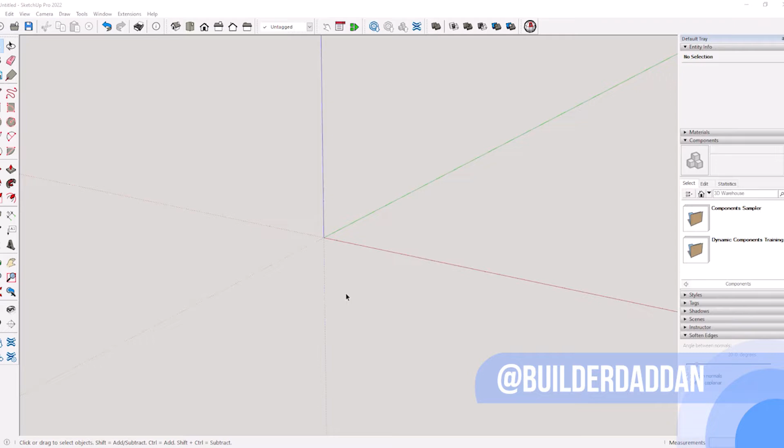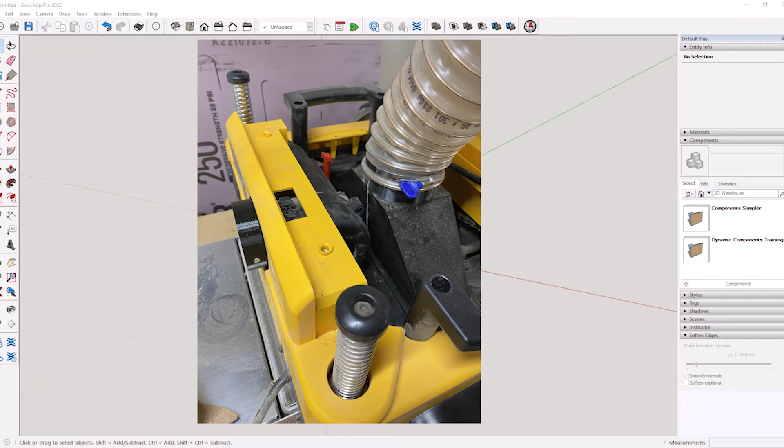I am BuilderDadDan, and today we're going to be doing a SketchUp tutorial. In this tutorial, we're going to build a cap for the DEWALT 735 planer. For this planer, I have recently modified mine to no longer use the chip extractor, and so I'm building a cap to go over the back of that. This way I can keep the fan in use, so the fan will keep the motor cool, and I can do this in a way that prevents somebody from putting their fingers in there and having their fingers connect with the fan. So we're just going to make a little cap here with some vents in it for exhaust. Let's get going.

Again, like always, I use the SketchUp Pro version. This is SketchUp Pro 2022. For this version, this is paid. Let's get started.

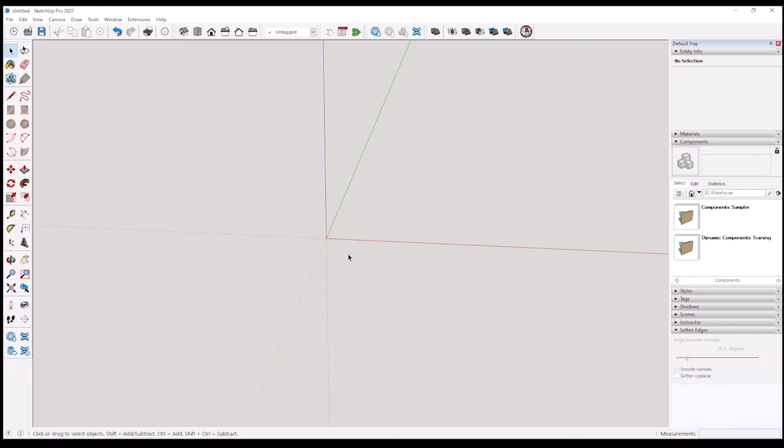What I like to do is give myself some reference points out into space. So I'm going to put a 5-inch line in there, and I'm going to go 0.5, kind of like a pirate - X marks the spot. Or in this case, I'm going to snap to my green axis. There we go. Now I've got a line there.

I'm using the line tool here, just an L on my keyboard pulls that up for me. I'm going to go ahead and drop a line out here on my red axis. The reason why I'm doing this, I'm adding in 0.5, 0.5 - that's all I'm doing. The reason for it is that I'm giving myself some points out in space.

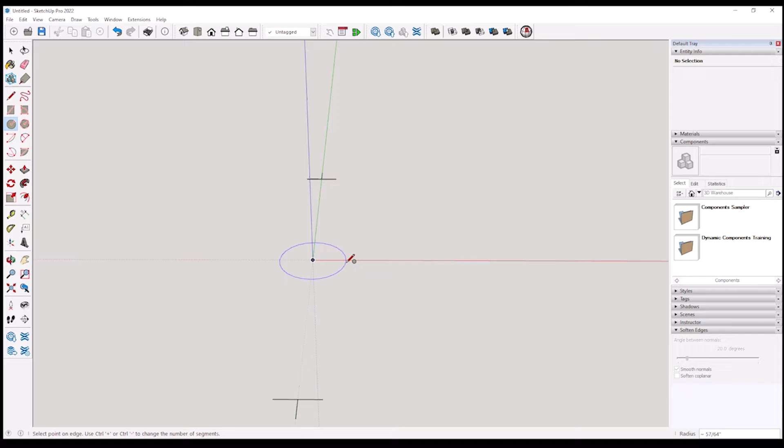I know on this, I'm going to be having a cylinder that I'll have to push through to make the 2 holes that I want. So I want a point in space that I know was straight at some point to reference off of. In this case, I know I'm going to have a diameter for the inner circumference of 2 and 13/16, so that's a radius of 1 and 13/32. There we go, and now I've got that.

Let's go ahead and tape measure to check that. That's a T on the keyboard to get to the tape measure command. We're going to click the outer area of that circle, and we're going to increase this up - basically I want to add a bunch of segments to this. For 3D printing, if we look at this right now, it's got 24 segments, and this is going to be very blocky when it prints. I want to make it as round as possible, so I'm going to try to max this out with what SketchUp will let me do.

So I'm going to try 170 segments - it doesn't like that, too big. Let's go 168, still too big. What about 150? Okay, it likes 150. What about 158? Likes 158. What about 159? Likes 159. What about 160? It's liking 160. 162. 164 - all right, 164 is good. 165. 166, 167 - all right, 166. So 166 segments across a circle that is 2 and 13/16.

All right, so now we've got that. Now for this, this will be the inner portion of it, and then we're going to have an outer portion. So I'm going to come over here to the offset tool. I'm going to click on that circle, and I know that I'm going to have a wall on this that's going to be 1/8 inch thick. So there's my 1/8 inch wall.

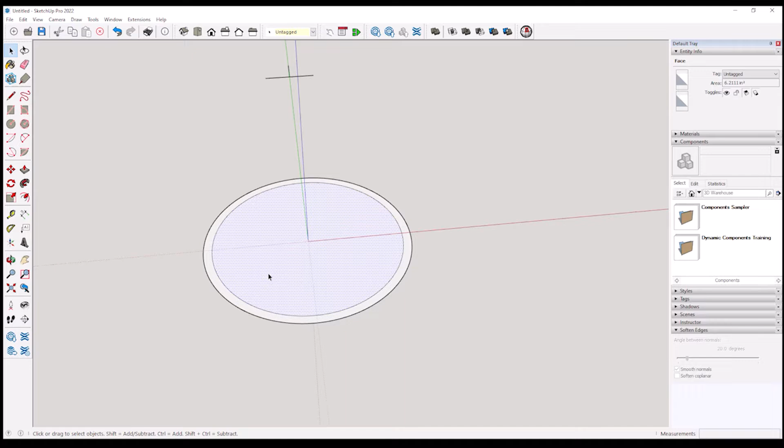There we go, and I'm going to go ahead now and pull this up, and I'm going to make this 1/16 tall - not a ton of structure to it, but it's going to be something nice. The reason for that is that I'm actually going to be printing this, so this is a 3D printed object. I'm going to have a 1/8 inch outer wall, and I'm going to have a 1/16 inch basically plate on the end. It'll kind of make sense as I get it drawing here.

So I push-pulled that - I hit the P on my keyboard to get to the push-pull tool. So I push-pulled that up 1/16, and now if you see here on the bottom, I've got that gap.

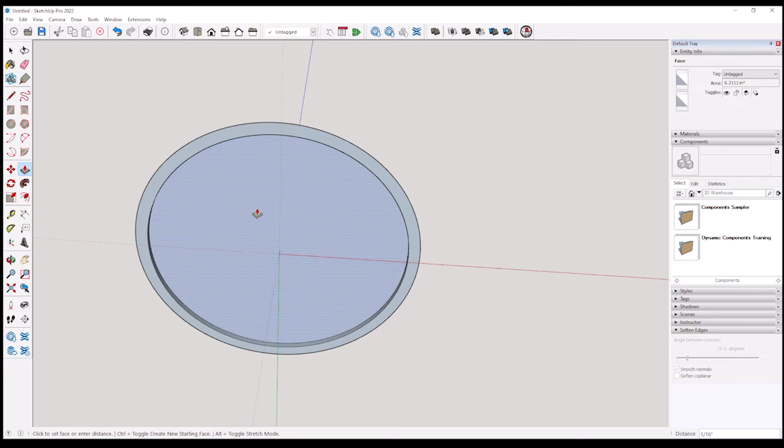So if I want to close that, I'm going to put my line tool on there, draw a line, and I've got that. Now I'm going to hit E on my keyboard and erase that. So now I've got something with structure, a solid object that's 1/16 inch thick.

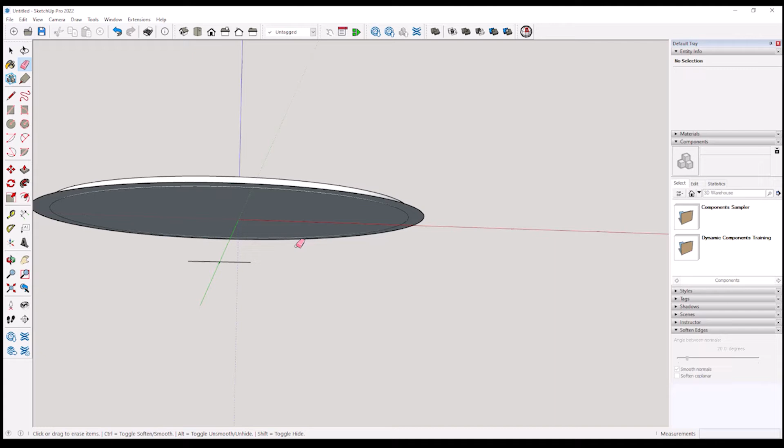I'm going to do myself a favor here and reverse the face on this, and that way it looks like a real nice model. All right, so I'm going to go ahead and push pull this.

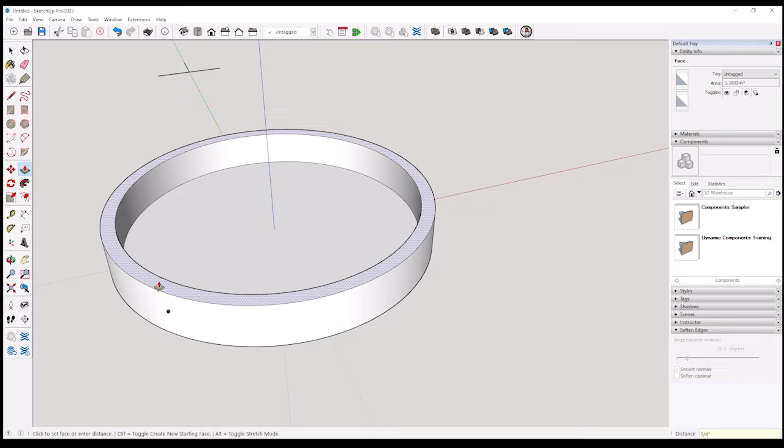I know that I want to come up to the same 1/16 there, and then it's got to raise up off the surface 3/4 of an inch to be fine there. So now we're going to double check down here. Everything looks good.

I'm going to go ahead and erase this geometry. This way it will be a solid object. You can't have extra lines when making solid objects. All right, so now I've got this all designed here.

We're good to go, and it's time to draw a cylinder to come across and pierce this. So I'm going to come back to my reference point in space here. I'm going to go up on the blue axis, and go 3/8 up and then add a 1/16 to it. I could have just done the math and it would have been 7/16, but hey, I was being lazy.

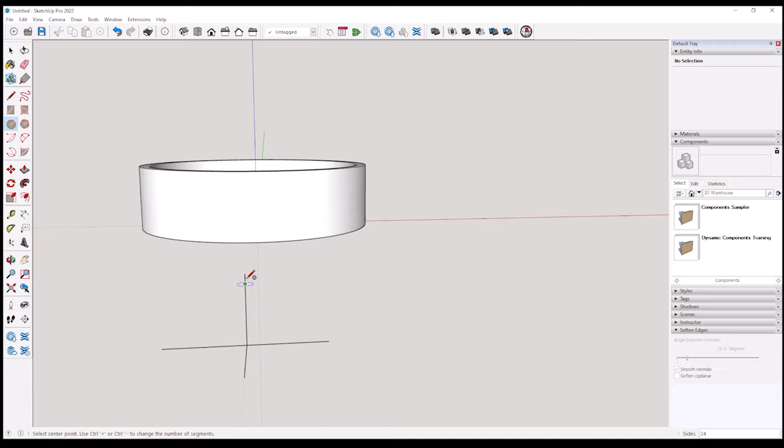All right, so I know I'm going to have a screw or a hole that's going to pierce this, and it's going to come across, and that hole is going to be 1/4 of an inch thick or wide. So I'm going to find my handy dandy circle, hitting C on my keyboard for that. I'm going to come back over here, and there we go. I'm going to make this 1/8. And there we go.

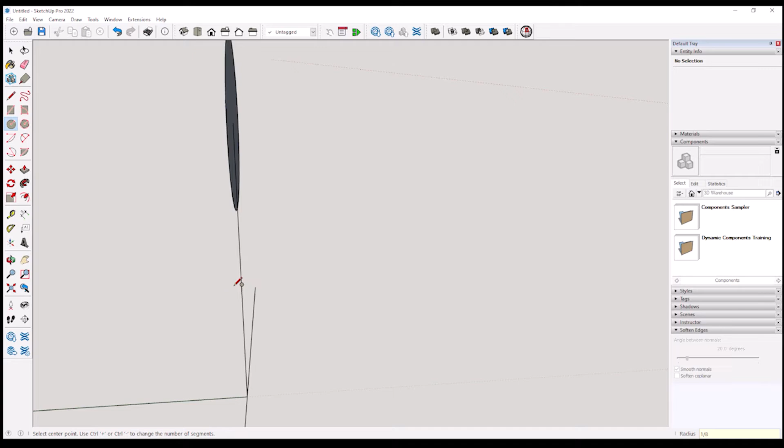Let's just double check that this is. This is what it is. All right, so let's go back here. I missed a step along the way.

I'm going to triple click this, and I'm going to hit G. I'm going to make this component A. Okay.

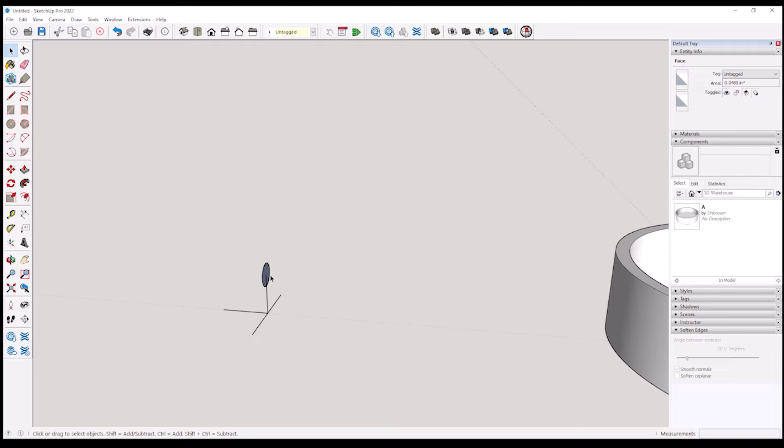And now I've got this little guy here. I'm going to just go ahead and push pull it. I just want to see what it does. And look at that. All right, it's going to poke through on that geometry.

Perfectly fine. All right, so I'm going to come back here for a second. I'm going to erase that. I'm going to erase that and erase that. I'm going to double click that there.

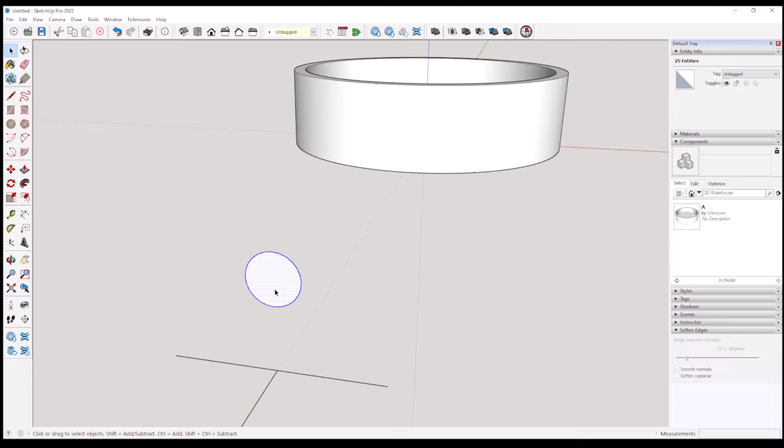I'm going to control B. Or control, sorry, I'm going to hit G and say B as in boy. And there we go, and we've got that. Now I'm going to go into this component. So I've got two components now.

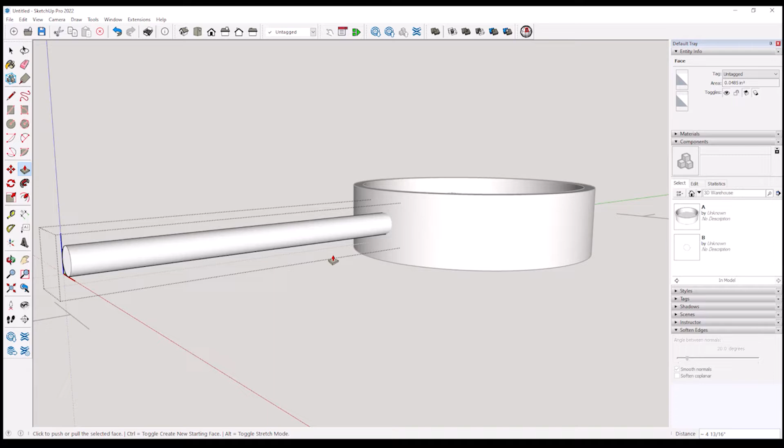I'm going to pull this across and pierce. Okay, so there's my first component. I'm going to pierce that there. I'm going to stop that there. I'm going to go ahead and pierce this twice.

Basically I'm going to have two pinholes. One's got a metal pin that's going to push in on the machine, and the other one's going to be a plastic pin that I've got to actually find and reference.

So what I'm going to do here is go ahead and move this. I'm going to hit Control to duplicate this, so I use the Move tool, M, to get to the Move tool. And once I'm in the Move tool, I'm going to go ahead and copy that. The reason why I'm doing this is to make sure these line up just perfectly fine.

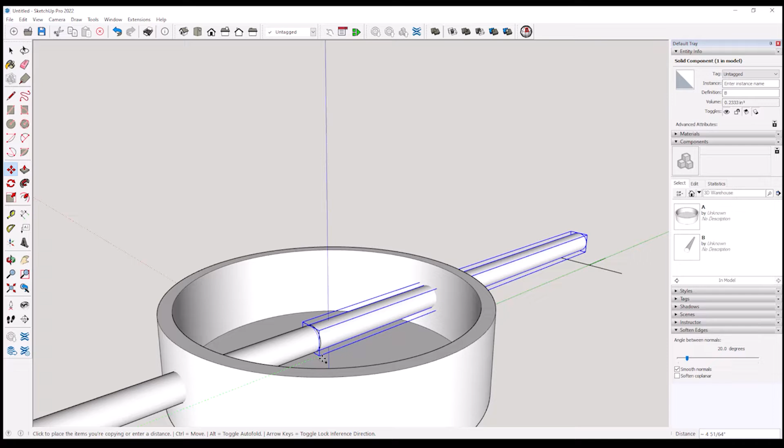And there we go. So now I've got two objects piercing. Okay.

So now, let me remember if I can do this or if I have to move the other object out in space for a second. I'm going to go up here. I've got the solid tools, the solid toolbar turned on to my machine. So that was under View, Toolbars. You can see down here where you can select solid tools.

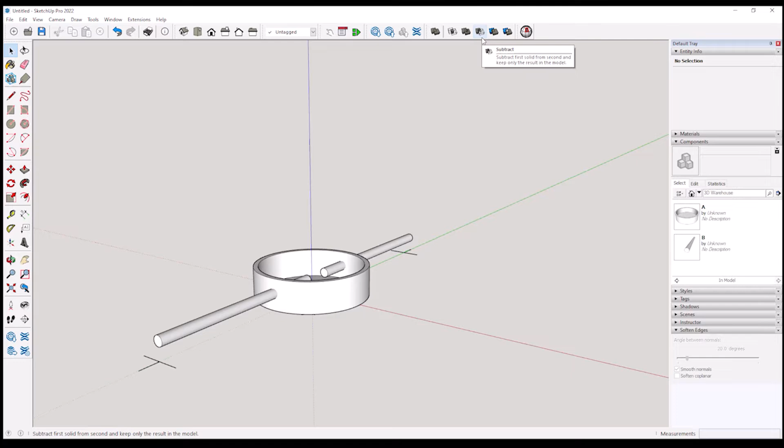Okay, I've got solid tools, and I'm going to hit the subtract. I'm going to pick that object, I'm going to pick this object. And now by doing that, if you noticed, I had two solid objects, and now I have subtracted the first solid object out of the second solid object.

But you know what I did? I'm going to back it up. You see all these little lines? I could have gone a little better with that circle.

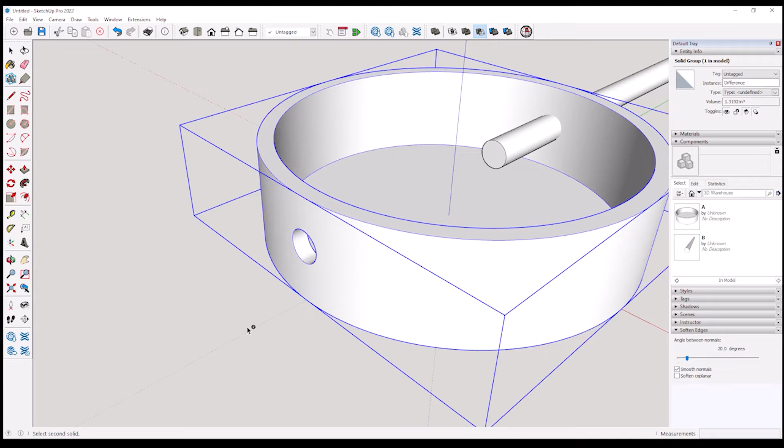Oh, Dan. Always with this. Control Z, backing on up.

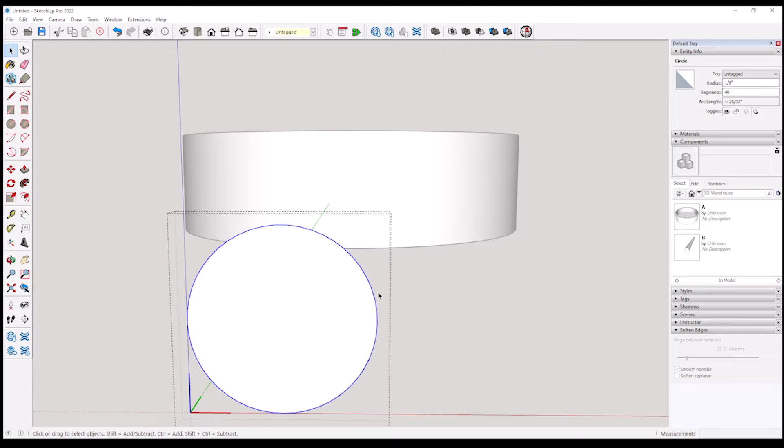All right, so we're back here. We've got our little object. Let's go ahead and click that radius again and see. I don't think we can do... I think we can do 29 for sure. Can we do 30? We can do 30. About 35? 35 works. 40? Okay, 40 works. I wonder if it's 48. 49? 49 works. 50? Nope. 49 segments, that's as big as you can do on a 1/4 inch diameter circle, or 1/8 inch radius.

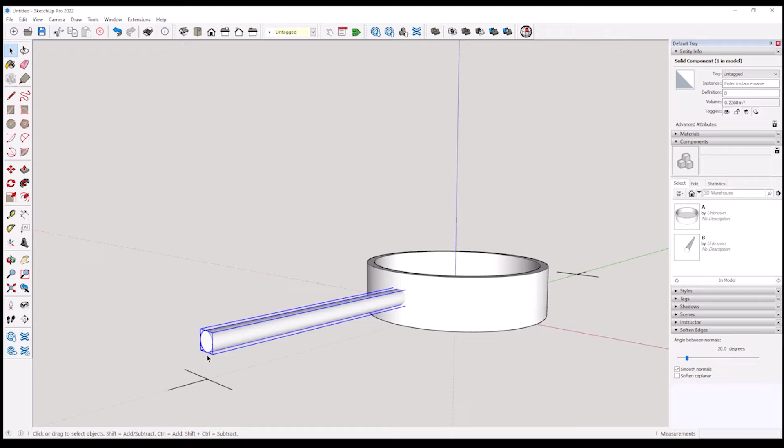All right, so now we go. Now let's do that again. So we've got our little object. We're going to pull this out and we're going to pierce. Okay, we pierced it. Let's go ahead and use the move tool. We're going to do that one more time. Hit control on that and drive it around there a little bit. And we're on the green axis. There we go, perfect, everything's lining up just fine.

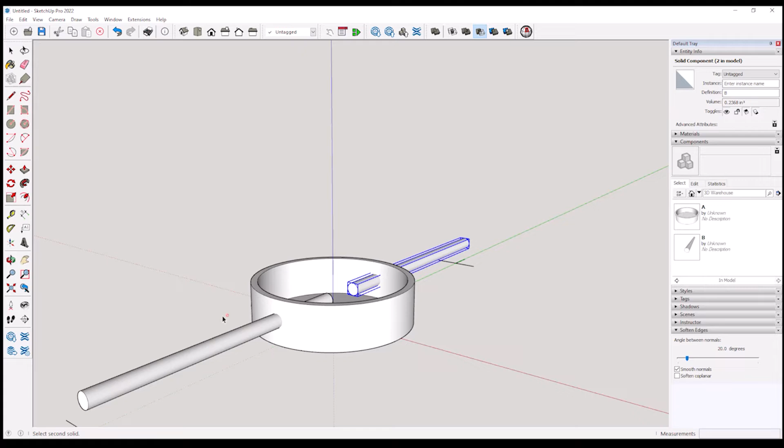All right, great, handy dandy. There we go. All right, back to our subtraction tool. We're going to select this, we're going to escape. All right, back to the subtraction tool. We're going to pick our first solid component and then our second. It subtracts it right on out, using that handy dandy tool to do that. And now here we go, now we've got this second piece here.

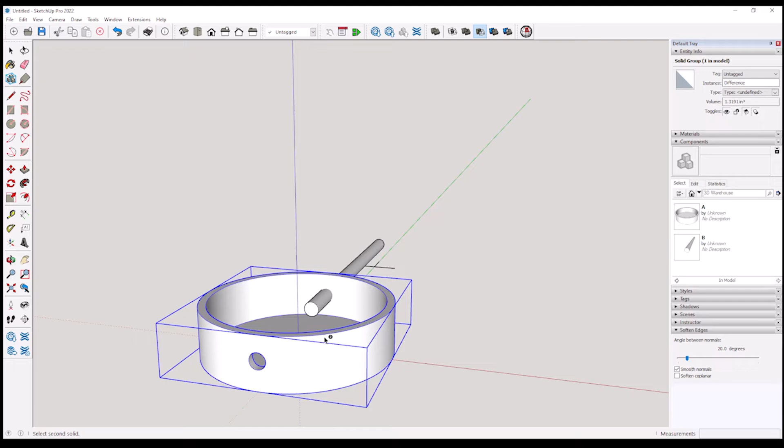The way this is going to work is that I need these two pins to be perfectly across from each other, and then I'm going to rotate it. So I need to be able to insert on this and then rotate down. So to do that, we're going to basically add over and then subtract a section to this.

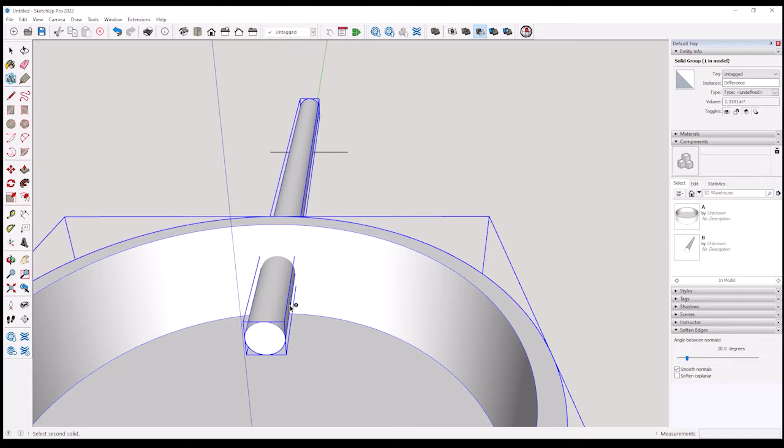So let's do this. All right, so here's what we're going to do. We're going to get out of that tool, select this, go to the move tool. I'm going to move, we're going to copy, and we're going to make these two touch. So now I've got two right there, so now I've got where I'm going to go and lock my pin into. And then I'm going to come up here and use these circles to cut this out.

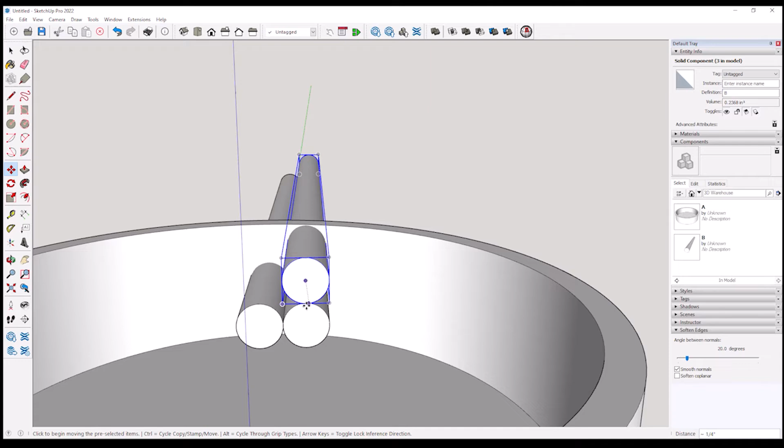Maybe it's not the most effective way, but maybe it is the way that is most effective to me. All right, and so there we go. We got two circles and we're going to cut this completely out all the way to the top.

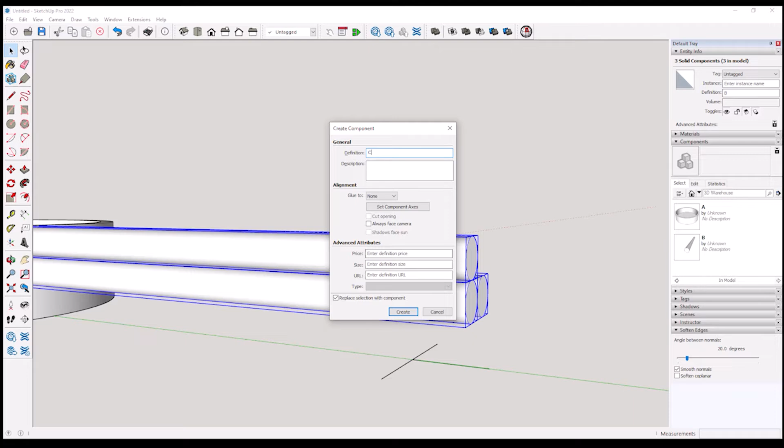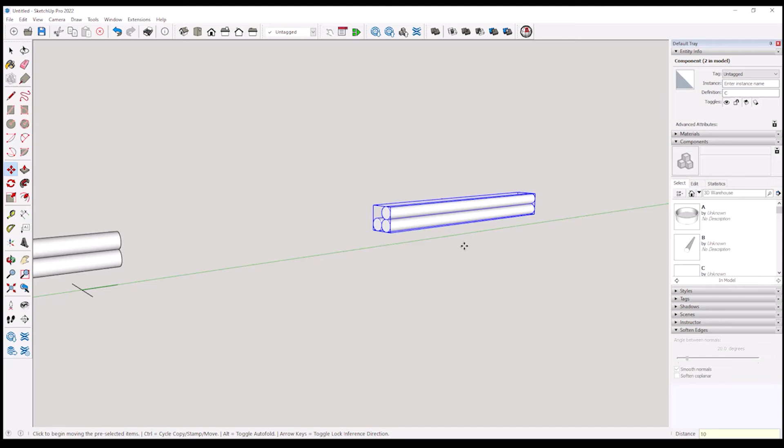All right, so here's how we're going to do this. I'm going to go ahead and turn these two things, or these three things, into a component. So I'm going to hit G for my components, hit this and go to C. So now I've got component C created right here. I'm going to go ahead and move component C out into the world here, and I'm going to just move this 10, so I know it's 10 out into the green axis.

All right, so now that I've got this here, what I'm going to end up doing is use the line tool. We're going to go into this and we're going to build a shape.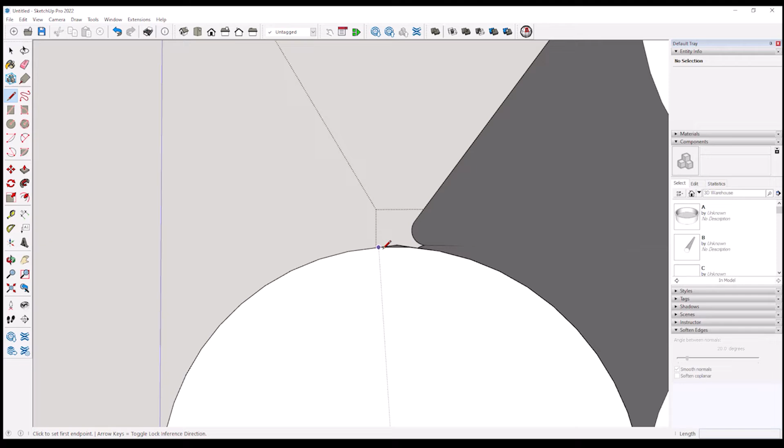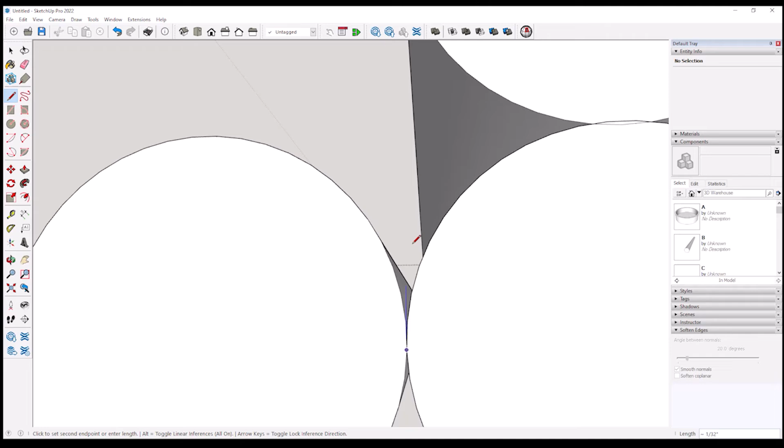Okay, all right, let's go in here and let's find, is that the highest point of the circle? Maybe, maybe not, let's start down here first, I guess. All right, let's go, we're going to go straight up with this, just a little bit to the top of that. Okay, so we've got a line there.

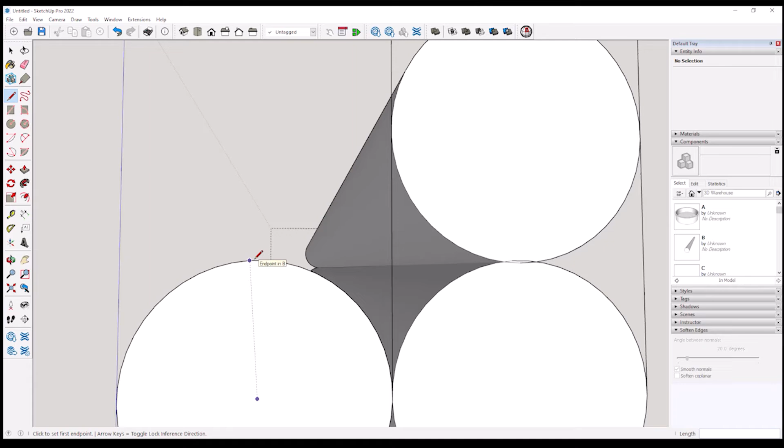And we're going to do right on this other side here. We're going to do a line here, a line there, connect this, connect the dots. Now we're going to come back over here and connect this over there. All right, and then we've got, I'm going to have to connect down here as well. And then we're going to come back over here.

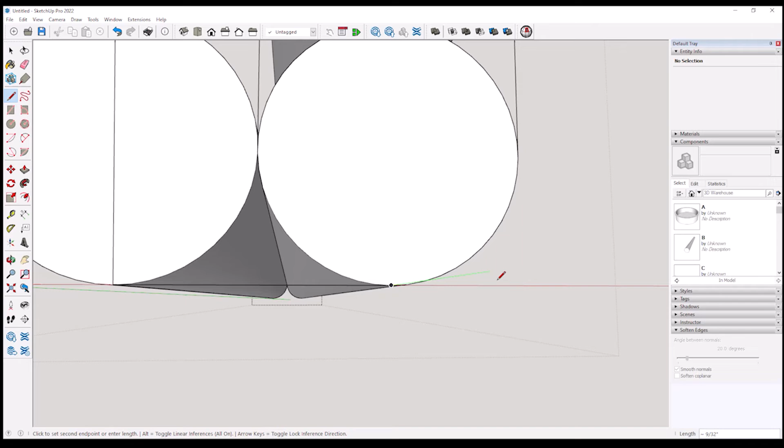Right there, and then we can connect. Let's see, we come down with the pin. The pin slides in, slides over. Do we need it all the way over? Don't mind me as I think through this real quick here. No, the pin can come down and slide over. All right, cool, so we've got that.

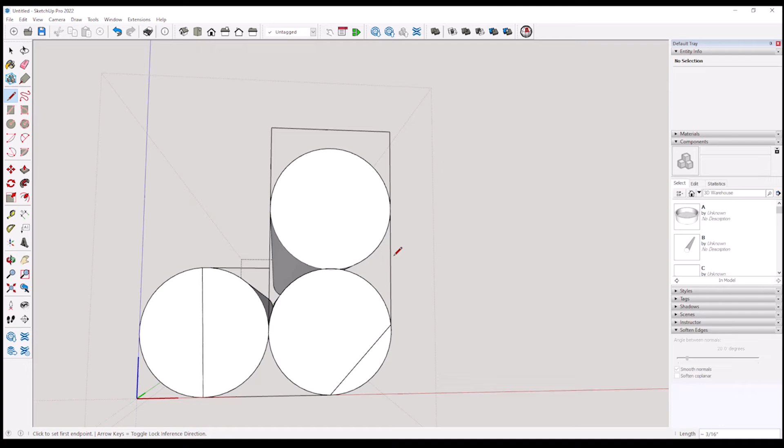So let's go ahead and mark that in. And then we've got... so let's see, we've got this here. That there. That there, from there to there. There. There to there, there to there, there to there. All right, perfect.

Now we've got some geometry to play with. All right, let's do this. We've got all that done. So now we kind of got a rough shape that we're going to cut out of that. So let's go ahead.

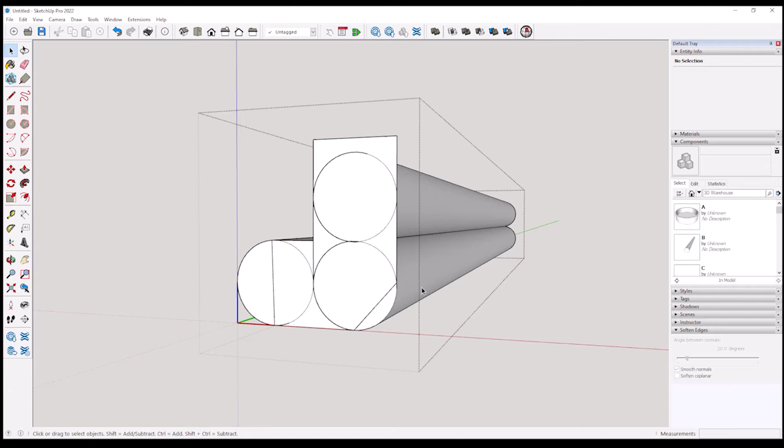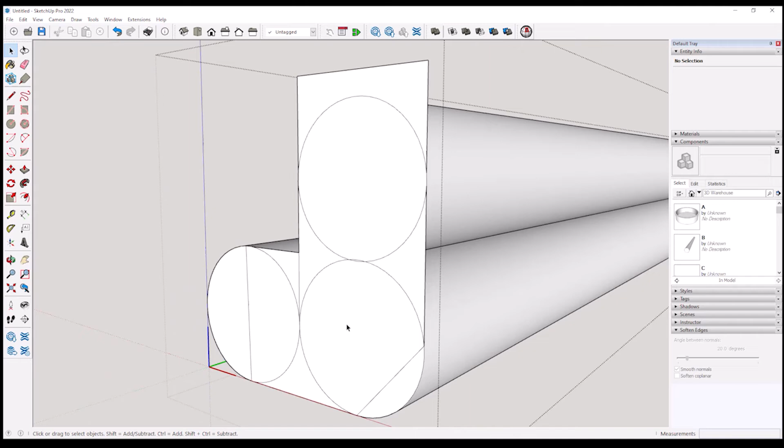I'm going to click these three things there, and we're going to explode these out. Okay, I'm going to explode those. And then let's do this. Delete that out. Okay, and then we can delete these there.

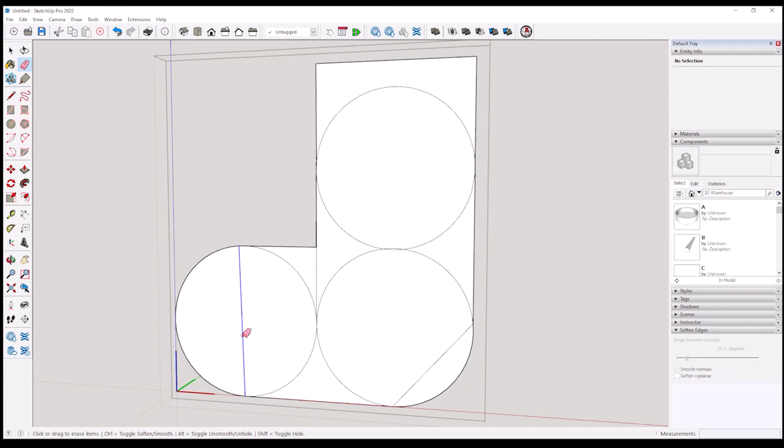All right, so now we've got this here at the end. And what we're going to do is we're going to go back to the eraser tool. We're going to drop out these chunks of lines here. So the one thing is when you're making solid objects, you have to remove all the excess geometry, and you can go to the view to view hidden geometry. There's a lot of different ways to do this, but we want to make a solid shape.

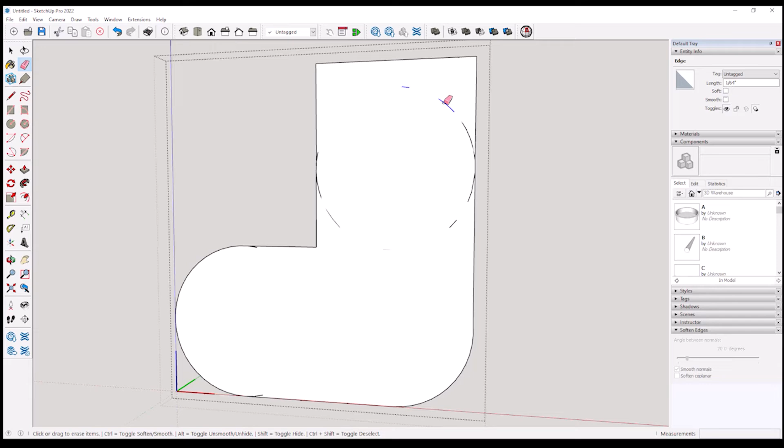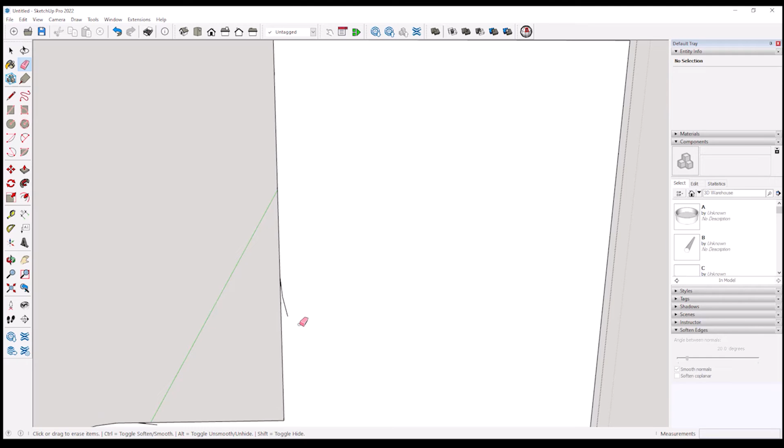There's also an inspection tool that you can get from the extension warehouse that allows you to basically remove or find and repair hidden geometry, because there are times where hidden geometry exists and you gotta get rid of it. So that's the fun part about doing things with a 3D printer in SketchUp, is you gotta make sure that all your hidden geometry is gone, especially when you're adding and subtracting things.

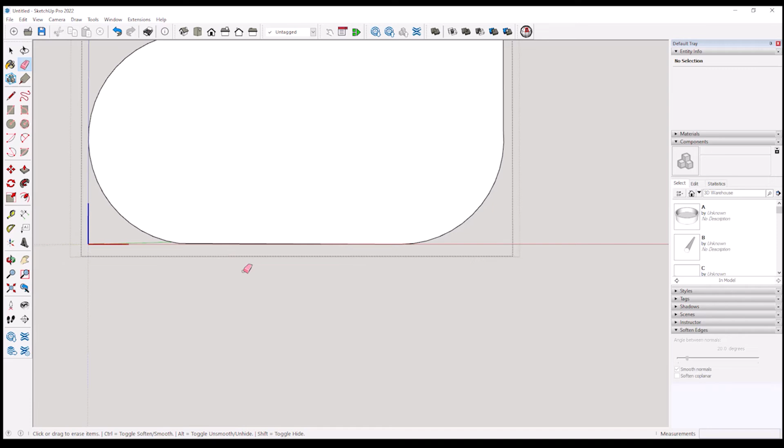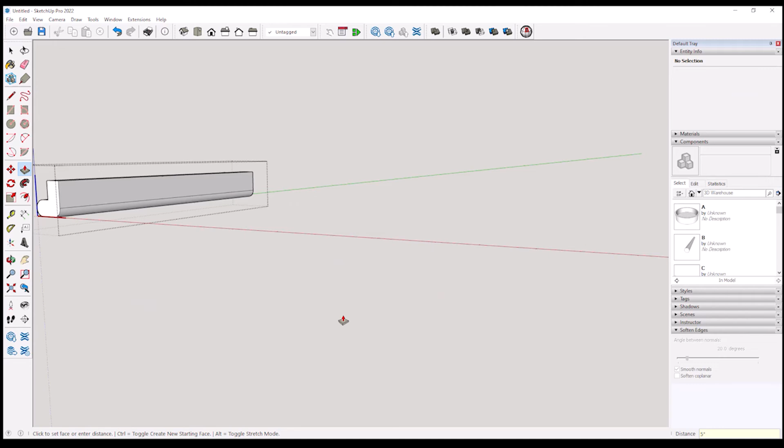All right, we got one more piece down here. All right, that looks good. Okay, well let's go ahead and push-pull this then. And we're going to push-pull this. What do I make this? Make this 5 long? Perfect. Got it 5 long, it's more than enough.

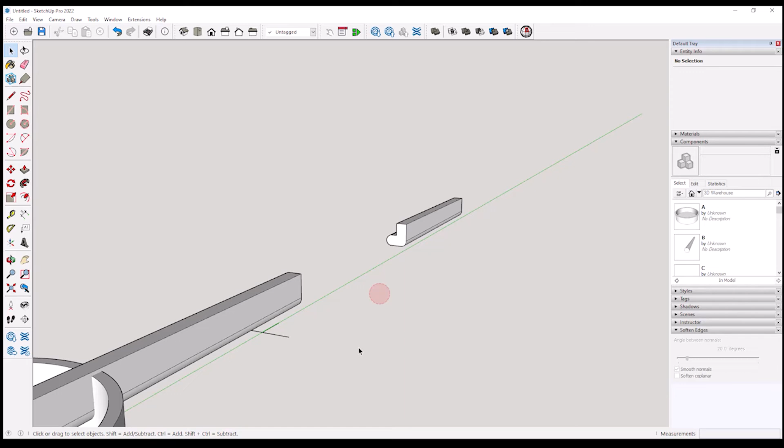There we go, now if we look back over here, we've got this. Ooh, that looks nice, okay. Here we go, moment of truth. If we hit the minus tool on the solid objects, that's a solid component, I don't have to fix it. Yay, okay, there we go, look at that.

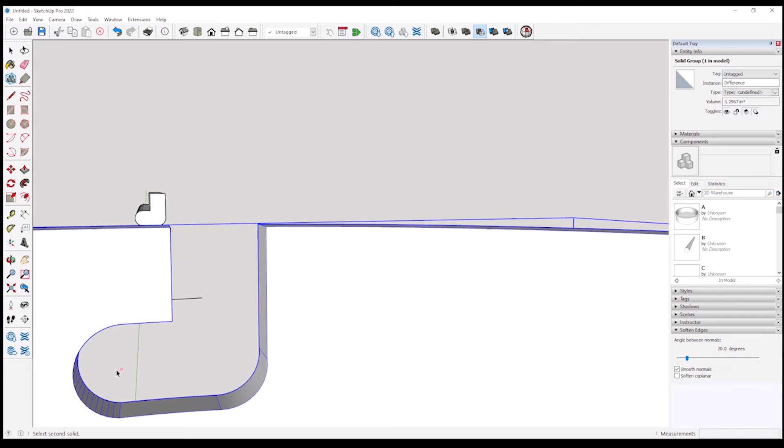Removed it out, and then we've got a little pin hole right here. It's going to mount onto this. This is perfect, all right.

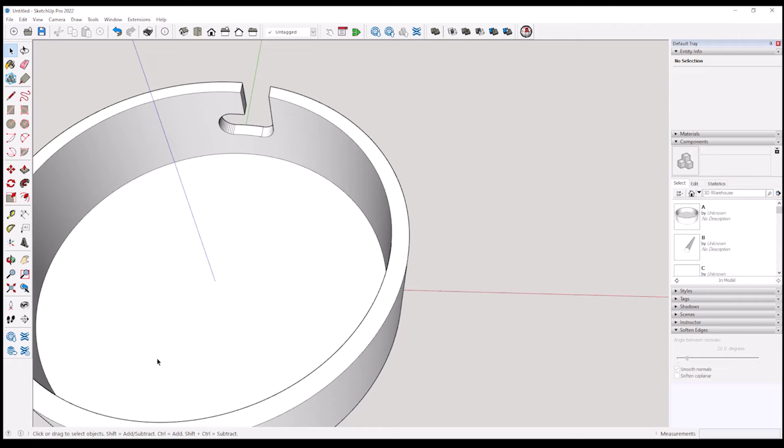So now we can go get rid of our geometry out here. We can get rid of our geometry out there. Here, little geometry, every little geometry. Old McGeometry had a farm, E-I-E-I-O. Oh, all right, so now I've got what looks like the cap.

Except now I need some air holes. All right, so let's flip it upside down. That's why I like this space mouse, see this? Now in the normal world, I could have gone over here to orbit and I'd have gone with my mouse and click, click, click, click, click. Instead, I spin up and I spin down.

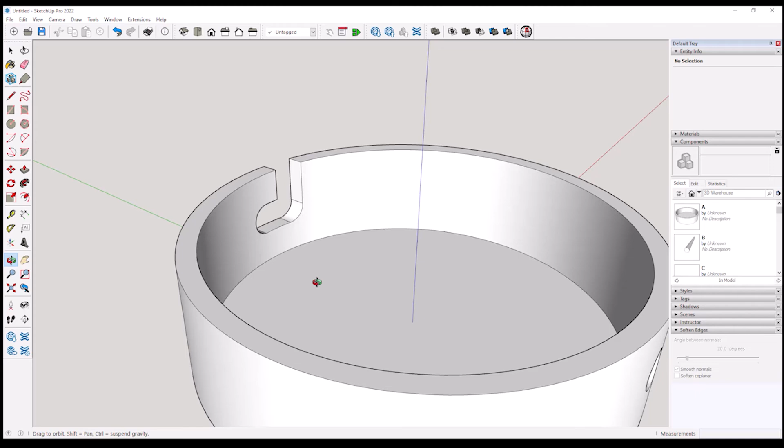All right, space bar to get back to the selection tool. We're going to do the line tool here, click right in the middle here, and we're going to see, we know we had an 1/8 inch wall on that. So let's look at what 1.25 looks like. That looks pretty nice, all right, so let's do 0.25.

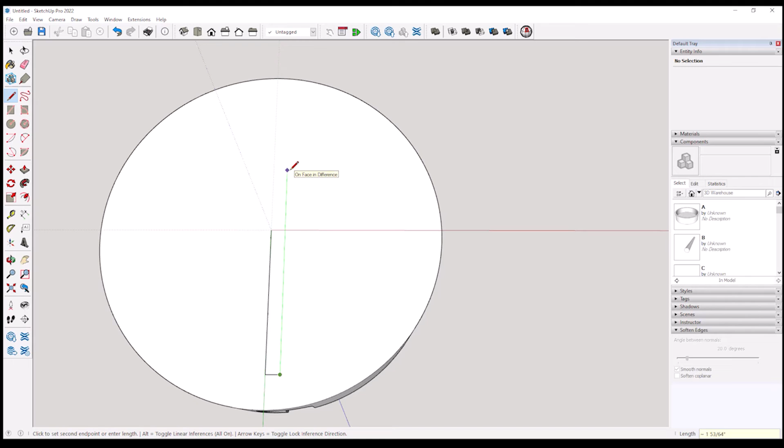No, that'd be 1/2 inch. We don't want a 1/2 inch there. Let's do from the center, let's do 1/8 of an inch. Okay, 1/8 of an inch. And then we're gonna go back this way, 2.5. We're gonna go over here, 0.25. And back down here, right there.

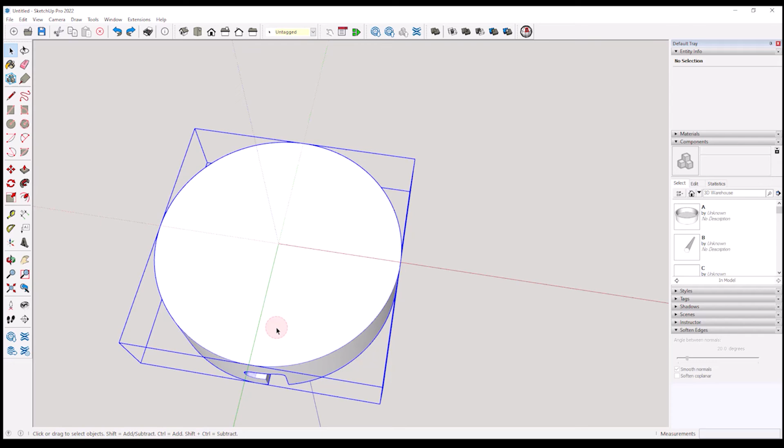Perfect, perfect, perfect. Whoopsie daisy, let's do that again. Back up, click into the component. I could have just copied that and added it in, but hey, I didn't do that.

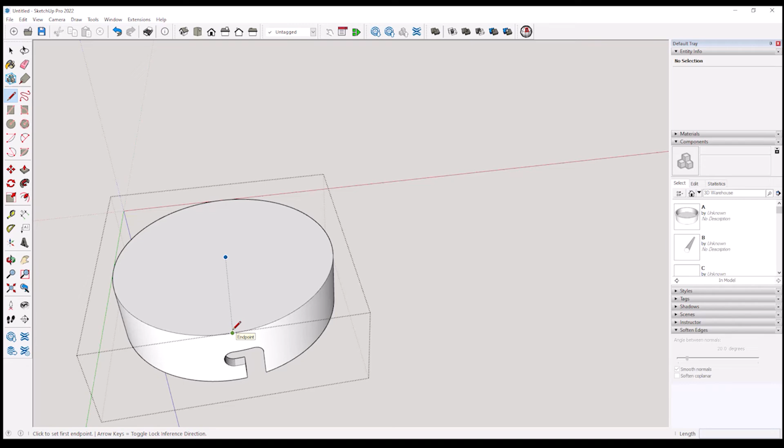All right. My geometry back. There we go, there's my center. Good, all right, found my center.

We said we're going to go 1.25. We're going to come over 1/8. Come down 2.5. Come over 0.25. Back up 2.5, and over. All right, now we got our first one in there.

From here, let's go ahead and let's make... what do we want to do? Ooh, you know what, instead of making it dead in the center, what if we do it like this?

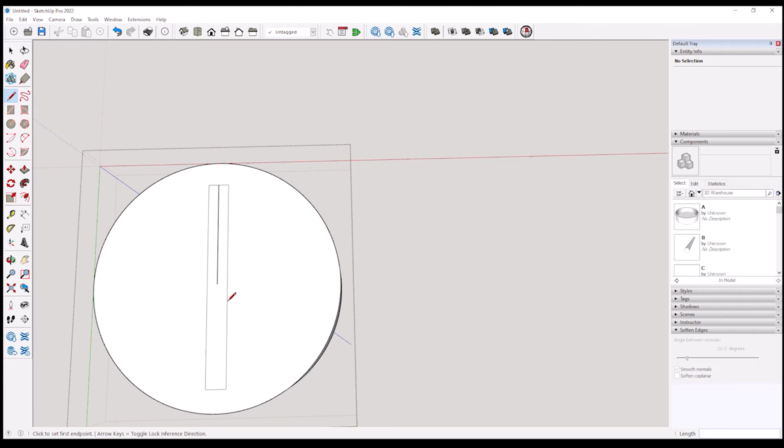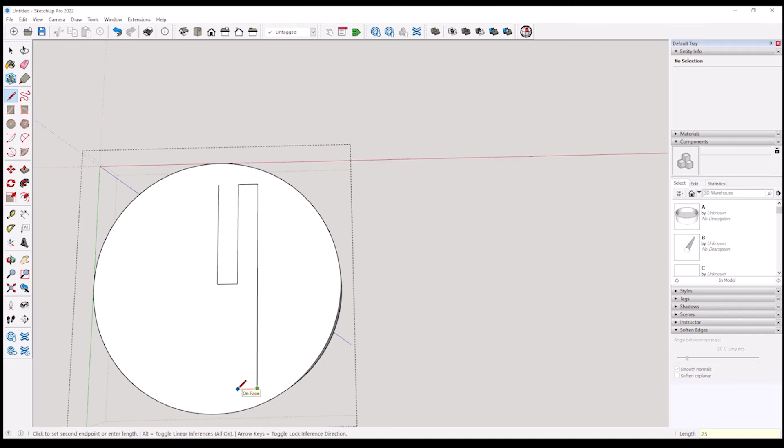Let's do this. Let's go to the eraser tool and erase this out. We know where our center line is. Let's go 0.25 this way, 0.25 this way, then 1.25 this way. We'll go 0.25 this way, 2.5 this way, 0.25 that way. And there we go. Let's go back over here and go 0.5 this way.

0.25, so we're going 1/4 inch, 1.25 this way. On the red axis, 0.25. Down here on the green axis, 2.5. Over here, 0.25, back up to here. Boom, boom, done.

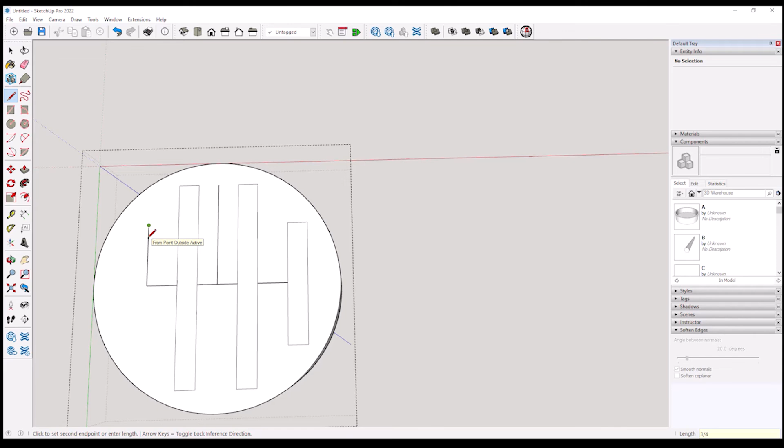All right, let's go back over here and do 3/8 over this way. We're gonna go 3/4 on the green axis, 0.25 there. We're gonna come down this way and do 1.5 inches. 0.25, and there we go. Ooh, that looks pretty, but I don't really like the squares on the corners.

So let's do this. We know we've got 1/4 inch each way here. How about we go back to the line tool? We know the halfway on this is 1/8, so let's do 1/8 of an inch there, and 1/8 of an inch there. Escape is getting me out of this. 1/8 of an inch there. I'm hitting escape so it remembers my 1/8 inch as I come down like this, and it's fast to be able to go like that with it. Here we go, 1/8 of an inch. There we go.

Now I'm going to come over here and use my arc tool. Click on the end of that 1/8 inch, and drop myself in an arc. And there's my arc. I realized here I forgot my 1/8 of an inch. Go back to my arc tool, come down here, draw my arc. On this, I'm not going to modify my segments. It's pretty darn close to what I can get, so I'll just leave that with that. How do I know that? Because I've done this too many times.

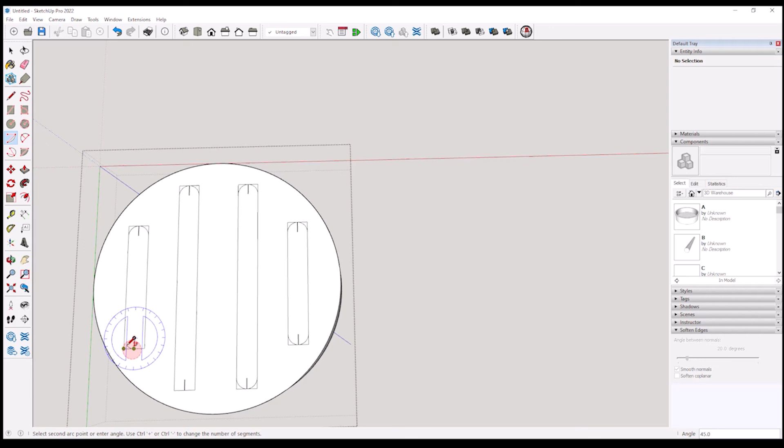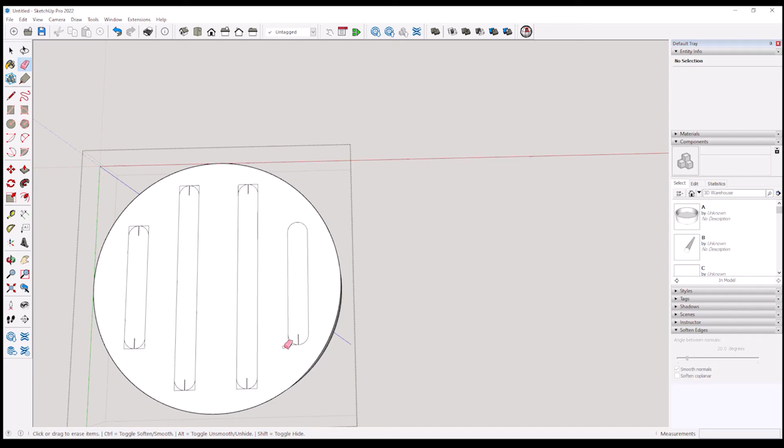So let's talk about this. Why did I want to do this cap? Well, the reason was because I modified my planer. I bypassed the chip extractor on the back, and I have a dust boot that I made that goes right over the top. That way I can use my dust collector and get better extraction on my chips. It's less wear and tear on the motor, and it works out really nice. But when I did that, I left the fan in because I wanted good airflow, so the motor stays cool, because I have a problem with that motor overheating from time to time and popping my circuit breaker. Even though it's rated for below 20 amps, somehow it sometimes pulls 20 amps because it's the only thing on that line.

Anyway, I definitely wanted to keep airflow going, but I want to protect fingers, especially since I've got kids in the shop. My kids come and help me, and I definitely don't want them to stick their fingers in here accidentally. So by doing this, I end up with a nice little thing.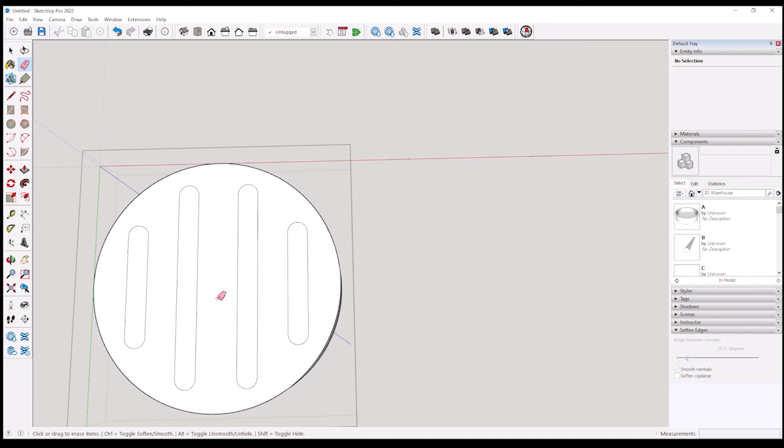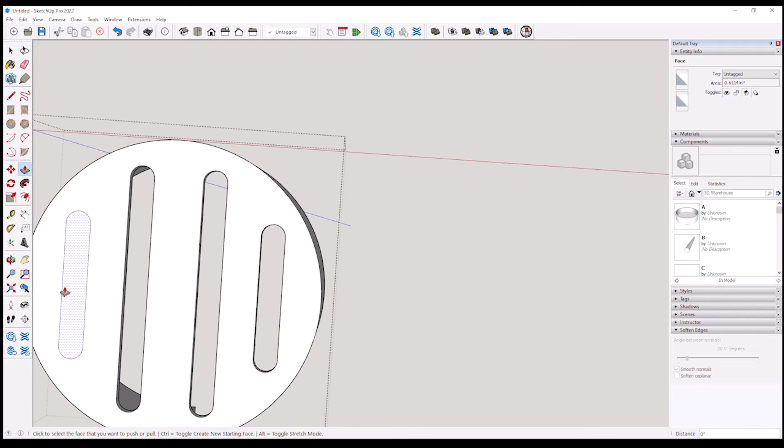All right, so now I've got my little dust port holes. I'm going to click on the center of that, use the push-pull tool, hitting P on my keyboard to get to that, and then go up and line that with the face. There we go, cuts it out. All I have to do now is go find the next one, double click, next one, double click, next one, double click, and there we go. We have this all done.

So there you go. This is a dust port cap for my DEWALT 735 planer. All right, that looks pretty nice.

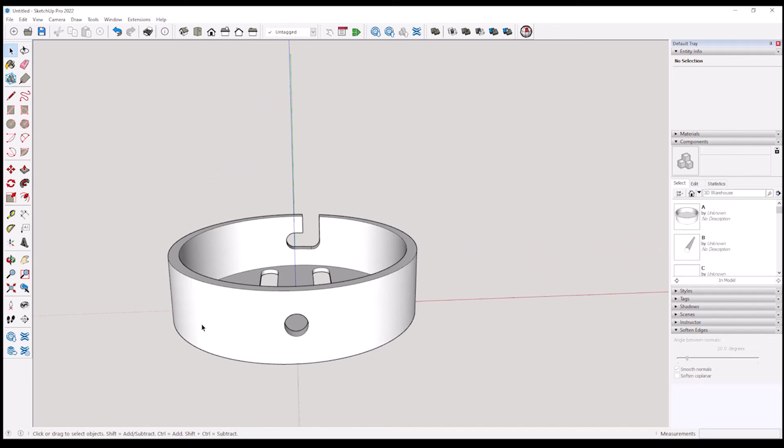So the next step for this for me is I'm going to go ahead and pull up my PrusaSlicer, put this into PrusaSlicer and get this sliced up and move on from there.